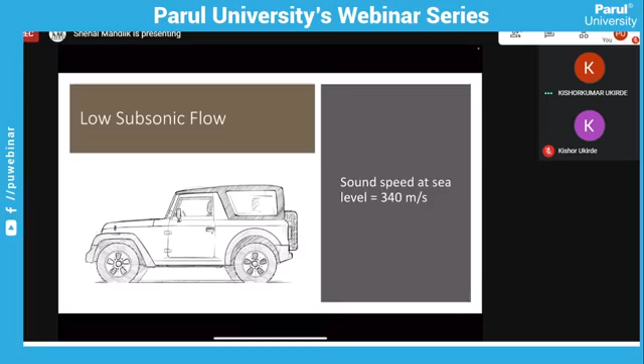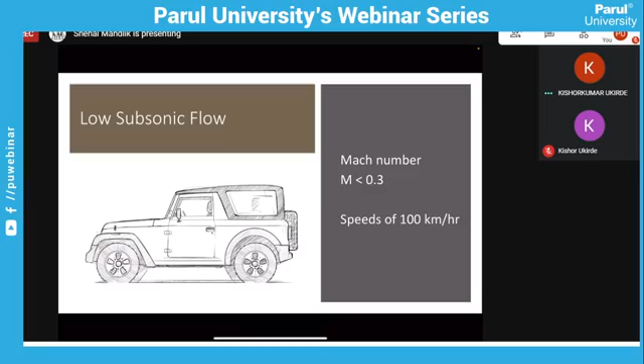It has a velocity of maybe 100 km per hour, or maybe it can travel at about 200 kilometers per hour. If you look at the speed of sound at sea level conditions, that is on the ground, it would come to about 340 meters per second. And now if you calculate the Mach number given by this particular formula, you will understand that the Mach number will come far, far less than 0.3. So such vehicles traveling at such low Mach numbers, less than 0.3, are traveling at a speed which is considered low subsonic flow speed. Okay.

Now our airliners, let us say for an example, the Airbus A380. This airliner generally takes a speed of about 0.8 or 0.7. That falls between the regime of 0.3 and 0.8. And these kinds of speeds are generally regarded in the category of high subsonic flows.

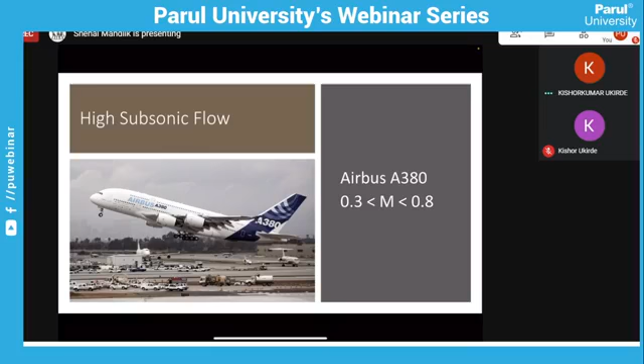Now, what if I increase my Mach number? What if I go close to the speed of sound? So let us assume that we cross the speed of sound and we were able to achieve a Mach number greater than 1. So we enter, that is, after crossing the sound barrier, which is equal to the speed of sound. Now, imagine that you go at a very, very high speed, which is far greater than the speed of sound. That regime would be considered as a hypersonic speed. Generally in fluid dynamics, speeds more than Mach number 5 are considered as hypersonic speeds. Okay, now what is this hypersonic?

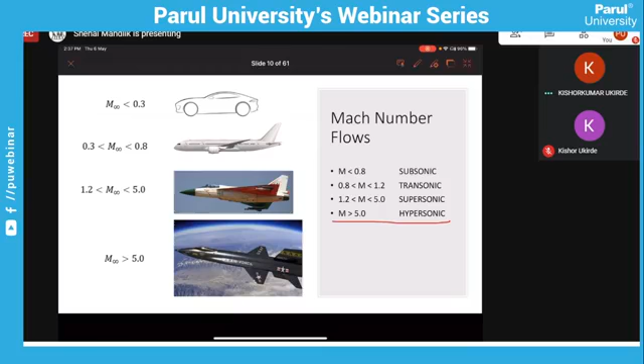So before talking about hypersonic, let us see how you actually cross the sound barrier, which is the speed of sound. When any vehicle travels at a speed closer to the speed of sound, for example, in this figure, a military aircraft traveling at about 0.8 or 0.9, it will experience shock waves generated on the surface of the body, and those shock waves interact with the boundary layers and separate them. That is going to induce drag on the body.

So you will also see such phenomena in the flow field when you are reaching the speed of sound in an atmosphere. This particular phenomenon is called the sonic boom, created when you are about to cross the sound barrier. Okay.

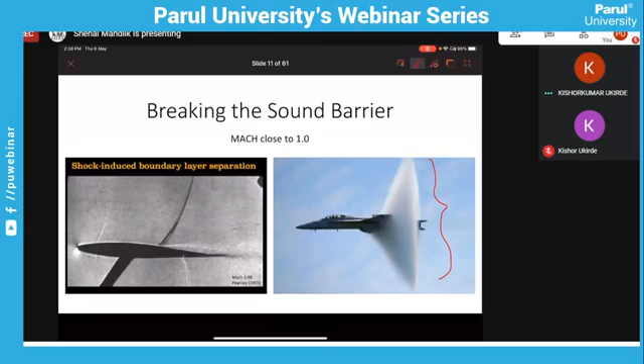Okay, so let us see at subsonic speeds, which is Mach number less than 1, any object will be emitting pressure waves. These pressure waves travel in all different directions, and they bring information of the surroundings to the object traveling at a particular speed. At subsonic speeds, this information is readily available to the object. Why? Because the pressure waves travel at the speed of sound.

When your vehicle is traveling less than the speed of sound, you obviously know the information about the surroundings, and hence you can adjust yourself to them. In other words, the flow around the object will adjust itself such that it follows the contour of the object. Now, when you reach Mach number 1, you see a very complicated phenomenon where the pressure waves overlap each other, and the object just knows that there is something around it.

And when you cross Mach number 1, the vehicle is traveling faster than the pressure waves, which are lagging behind the object. So the object is moving faster than the speed of sound, meaning the pressure waves lag behind it. So the object now doesn't have any information about the surroundings, and the gas molecules present in the surroundings actually come and hit the object.

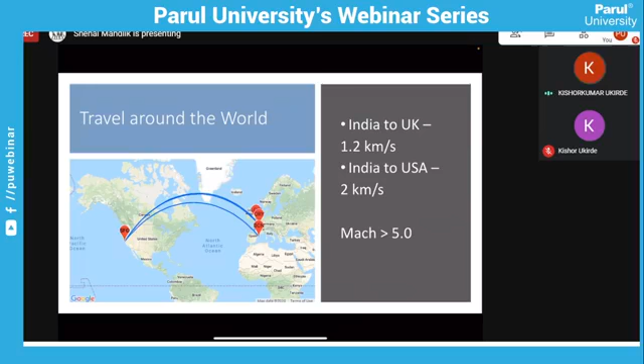So we'll go back to our question: can we travel within a couple of hours? Yes. So if you travel at a speed of about 1.2 kilometers per second, you will be able to reach UK in maybe a couple of hours, maybe 2 hours. And if you are able to travel at a speed of 2 kilometers per second, you will be able to reach USA from India maybe in just 2 or 3 hours. So these speeds, what I am talking about, correspond to Mach number greater than 5.

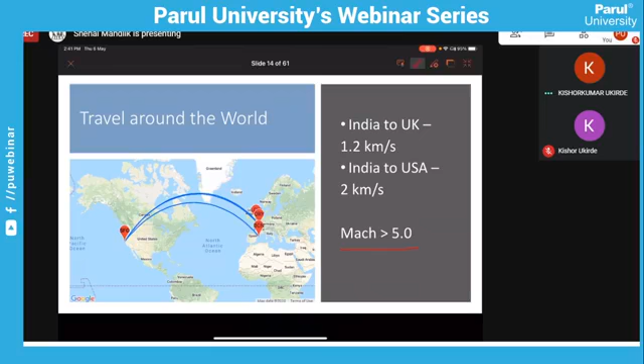Okay. So what is the meaning of hypersonic technology that I am talking about? The hypersonic technology means that we are going to save our time. Probably you might have a lunch in one country and go back for the dinner to your own country. You can go for a space exploration, you can go for interplanetary travels, or you can just go for a tour to the space with your family. So once the hypersonic technology comes into picture, all these things could be possible.

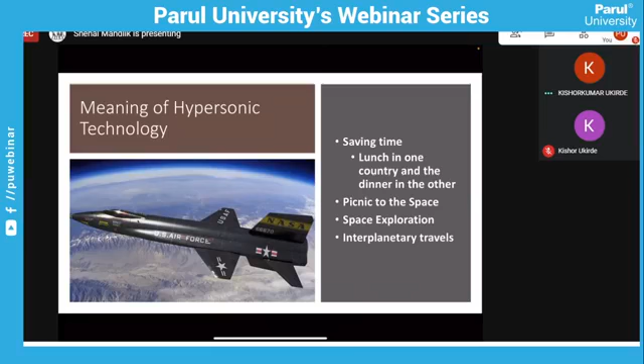There are certain applications of hypersonics. So the technology could be used for space exploration, the interplanetary travel, the missiles guidance system, the missiles which could be useful for the national security, the atmospheric re-entry of the vehicle into any of the planet's atmosphere, and then obviously the commercial flights, which will be helpful for the common man.

So there are certain subdisciplines we must look into before getting into hypersonics. These subdisciplines of hypersonics govern the entire flow physics or the design of the vehicle. First is the structure. So when you are traveling at very high speeds, the vehicle experiences very high mechanical loads, which may not be very stringent for the subsonic or the supersonic flight aerodynamics, but for hypersonic aerodynamics, it is very important that you design a fuselage which can withstand such high mechanical loads.

Next is the guidance and control. If you are traveling at such high speeds, which is equivalent to 2 kilometers per second, let us say, for an example, at that high speed you may not be able to guide your vehicle using a satellite or using a ground station. So there is a need to develop autonomous guidance systems and advanced control systems, which will guide the vehicle in all the different atmospheric conditions. Okay, and also the hypersonic vehicles deal with a high altitude, and there is a need to additionally include the control measures such that at those higher altitudes the vehicle should be able to sustain the speeds.

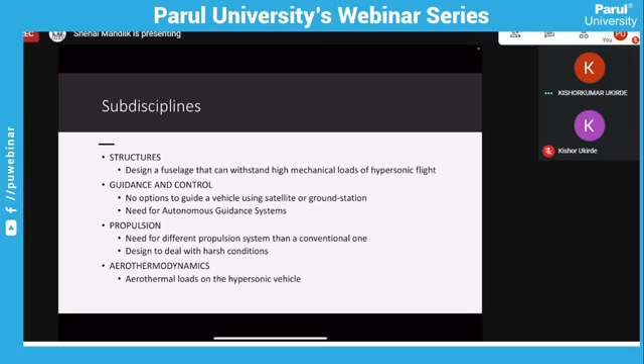So before talking about these vehicles, let us see what hypersonic actually means. So hypersonic is a discipline which connects aeronautical as well as astronautical engineering, where we see the body is moving in a gaseous atmosphere, where the velocities of the body will be far larger than the speed of sound.

Okay, or the speed of sound in the gases. Now, specifically, aeronautical engineering deals with the flow around vehicles which are traveling at subsonic speeds or supersonic speeds. That could include airliners, your helicopters, your drones, or maybe a supersonic fighter. And all these different phenomena occur within the Earth's atmosphere.

Now, coming to the astronautics domain, it deals with the orbital motion of the satellites and the planets. Okay, the motion is obviously happening in the vacuum of space. So hypersonics, the discipline which connects aeronautics and astronautics, sits between these two fields, where if you want to increase the speed from aeronautics and enter the astronautics domain, you need to have a certain gateway. So hypersonics could act as a gateway that connects aeronautics and astronautics.

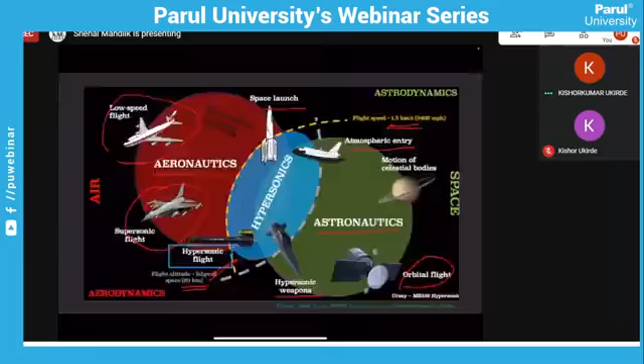Particularly, if you talk about hypersonic speeds, it could be bounded by a lower limit of as low as about 1.5 kilometers per second, and it will be bounded by a maximum altitude of roughly about 90 kilometers above the Earth's surface. Okay, so as I was mentioning, there are a few types of hypersonic vehicles. One is the atmospheric re-entry vehicle. The classical figure that you see here is of Apollo 11, from the moon mission in 1969, which could enter the Earth's atmosphere at a certain orbital trajectory.

Okay, so when the vehicle enters the Earth's atmosphere or the atmosphere of any other planet, it will enter at a speed of about 8 to 12 kilometers per second. And when it is entering at such high speeds, it will suddenly experience the gaseous environment, and in that gaseous environment there will be high mechanical loads and high heating around the surface. Okay.

And it is also important that this atmospheric re-entry vehicle enters the Earth's atmosphere following a particular trajectory, and there should not be a very large landing radius for this re-entry vehicle. Why? Because these vehicles are landed in the sea, so if the landing radius is quite large, there will be a huge investment that could go only into finding your re-entry vehicle.

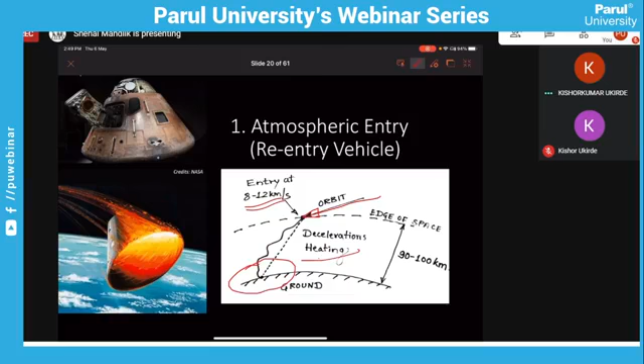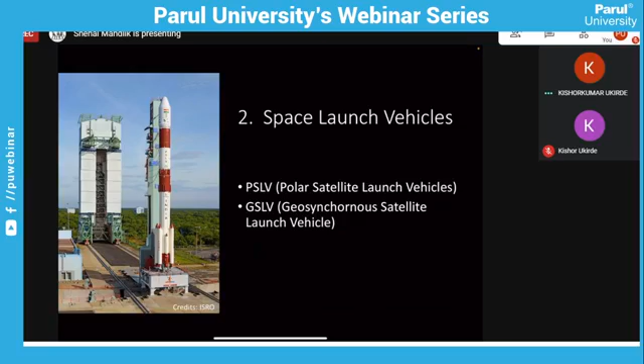The second kind of hypersonic vehicles would be of importance to launch certain objects into space or into the orbits of the Earth. So that could include some of your rockets. Obviously, these launch vehicles shown in the figure are hypersonic, but using these rocket launch vehicles, we can launch spaceships like the one shown in the figure, which is the RLV-TD, the Reusable Launch Vehicle Technology Demonstrator developed by ISRO.

So whenever the rocket launches the vehicle, it follows a particular trajectory. Before exiting the edge of space, or this particular atmospheric limit, it should add a certain velocity to the object which has to be placed in orbit or which has to escape the orbit. So depending on that velocity, the object, let's say a satellite, will be placed in a circular orbit. There could be a few other means to launch spaceships, like using hypersonic gun rails, as well as some other technologies which are still under development. So when you use such high speeds at ground itself, you will be facing heat loads acting on the surface of this vehicle. Okay.

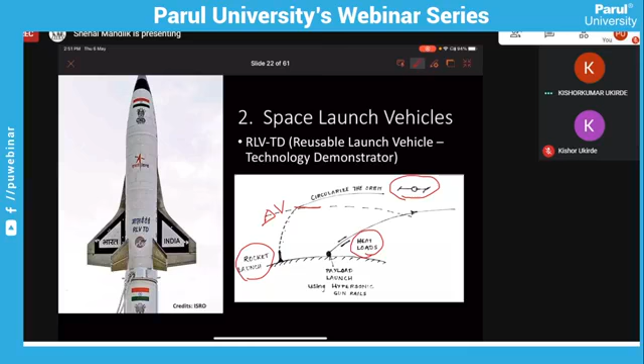And there are a few hypersonic weapons which could be developed for national security purposes, like intercontinental ballistic missiles, boost glide, or cruise missiles. These all could be useful to protect the nation. Okay. This kind of missile could also be very helpful in delivering conventional or nuclear payloads within a few minutes, and it can also effectively penetrate missile defense systems. And also these kinds of weapons would be helpful to knock down satellites which might be roaming around in your atmosphere. Okay.

And a few other applications of these hypersonic weapons include the launching of small or medium-sized satellites at a very low cost.

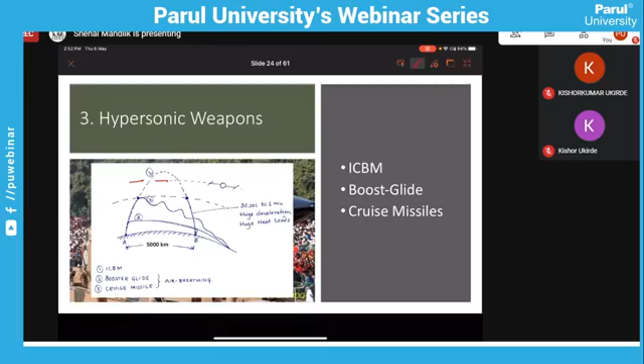And a very final type of hypersonic vehicle could be a hypersonic commercial flight, which everyone would like to see in the near future, that could make civil transportation very fast. This is an interesting and exciting field where people are still working, and it will be operating within the Earth's atmosphere.

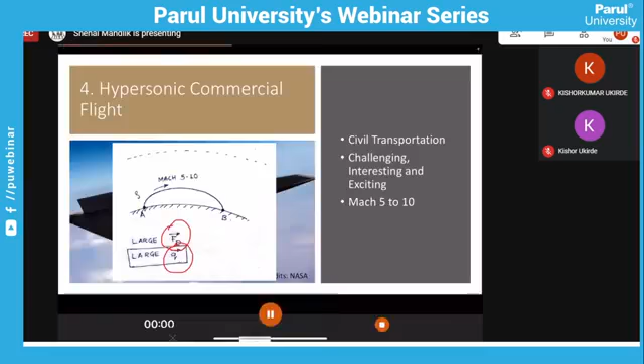Okay, but when you're operating in the Earth's atmosphere, you will obviously see that these kinds of vehicles will experience large drag forces and large heat loads, and those are a few of the challenges in the hypersonic flow field. Okay, so this is a view of NASA's X-43A, which is a hypersonic craft they tested a decade ago.

So coming to the history of hypersonic flow. How did hypersonic flight come into the picture? What you see in this slide is the picture of a V2 bomber. It was originally designed as a supersonic missile during the World War by Wernher von Braun. Now, after the World War was over, this rocket, or this V2 bomber, was used only for experimental purposes.

And one fine day, when this rocket was launched on 24th February 1949, they were not able to recover it. They later found out that this rocket went as high as 392 kilometers from the Earth's surface, and it was able to reach Mach number 5.3. And on that day, the V2 bomber became the first human-made object to go to hypersonic speeds.

Okay. Now, this particular object, which was originally designed as a supersonic missile, went hypersonic. So what happened to the vehicle? The answer lies in the next slide. So let us see one video about what could happen if you go hypersonic.

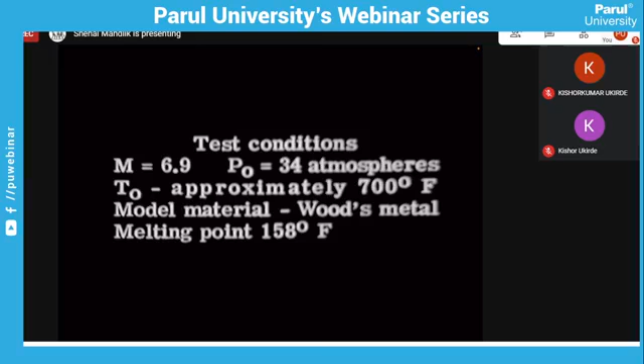So this is one of the experiments that was done at NASA's Langley hypersonic wind tunnel, where the model was kept in a hypersonic flow of Mach number 6.9. So we have a hemispherical headed cylinder here. When the sphere is kept in a hypersonic flow, let's observe what happens to the object.

So you can see that the front nose of the object is melting down, and eventually the entire object will disappear in the atmosphere. So it is very surprising to know that at such high speeds, if the material or the craft is not able to bear the mechanical and thermal loads, it will melt down or turn into ashes. And that's what happened to the V2 bomber.

Okay. And if you look a little bit ahead, they had a conical object kept in the wind tunnel at the same speed. So the conical cylinder turned out to be a hemispherical headed cylinder.

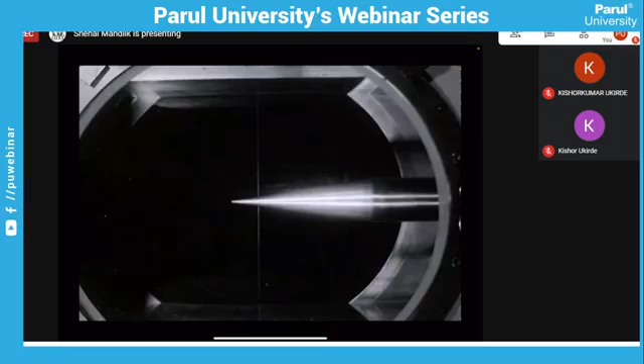Okay, so as I said, the V2 bomber completely disintegrated or burnt into ashes. Next, a few years later, on 12th April 1961, Flight Major Yuri Gagarin took the first flight around the Earth on Vostok 1, the Soviet Union spaceship, and he was the very first human being to experience hypersonic speeds. The speed he experienced was about Mach number 25, a tremendous speed to experience in a spaceship. He took a flight of about 108 minutes around the Earth.

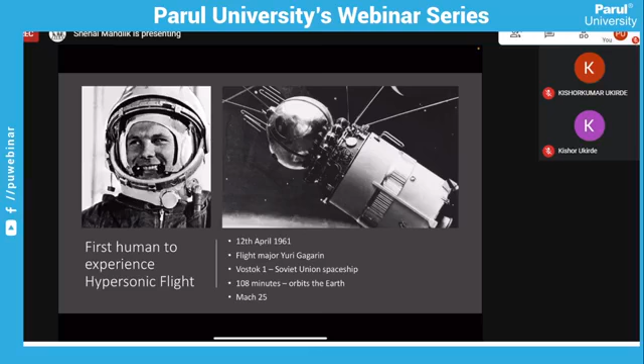Later, there were many developments in the 1960s. For example, in 1961, on May 5, Alan B. Shepard became the second man to take a hypersonic flight in space, where his re-entry vehicle was at a hypersonic speed of about Mach number 5. In the same year, on June 23rd, US Air Force test pilot Major Robert White flew the X-15, a hypersonic aircraft, at about Mach number 5.3. And in the same year, the X-15 broke its own record and reached Mach number 6.

And later, on August 22, 1963, the X-15 broke its own record again, reaching Mach number 7 at an altitude of about 107 kilometers. Okay, so 1961 was a bumper year for manned hypersonic flights, where humans could actually experience hypersonic speeds in either a re-entry vehicle or a hypersonic aircraft.

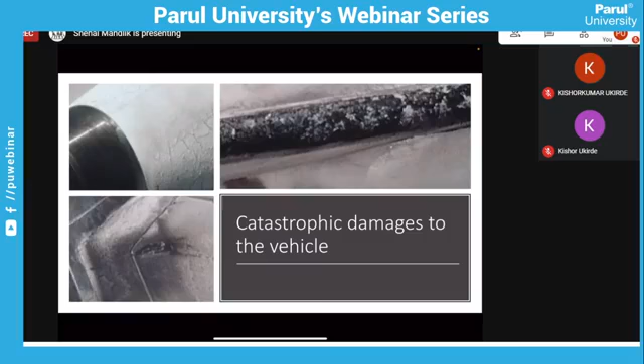So what happens when you have such high temperatures is this. Your spaceship or the spacecraft or the re-entry vehicle, any hypersonic vehicle, will experience such kind of catastrophic damage. The fuselage will go off or it will burn off into ashes. So there are certain challenges in hypersonic flows, like the thermal barrier, which is the main challenge. And because of the thermal barrier that you have at hypersonic speed, you have to develop materials which will be compatible with that particular temperature. So we will be developing thermal protection systems for hypersonic vehicles.

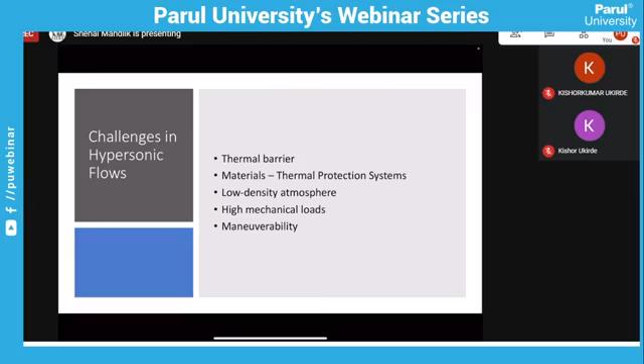And there are high mechanical loads, there is a low density atmosphere, and the maneuverability of the craft. So the fundamental problem in hypersonics is to calculate the mechanical loads on the aircraft and to investigate the thermal loads on the aircraft, which might be very easy for subsonic and supersonic flows. But if you talk about hypersonic, both these loads have a strong coupling among themselves, and there has to be a design strategy to estimate these kinds of loads on a hypersonic vehicle.

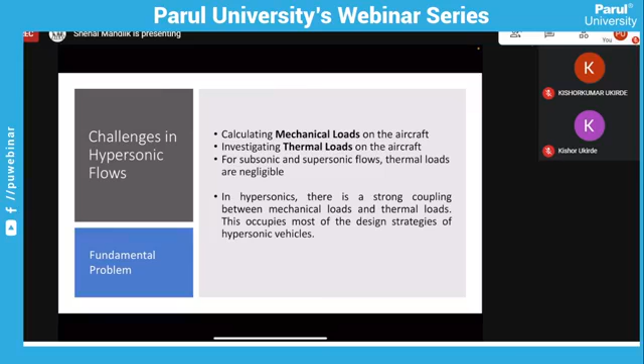Okay, so there is a few research going on in the world, be it ISRO, DARPA, Boeing, or NASA, to name a few, who have been investing in hypersonic technology, such that maybe in another 10, 20, 30 years, we will be able to do so. Obviously, all of them have been working on this technology for the past 50, 60 years. So just for an example, Boeing's X-51 WaveRider, which took its unmanned flight in 2013, was able to achieve speeds of about 1788 meters per second, which is 1.7 kilometers per second, at an altitude of about 21 kilometers.

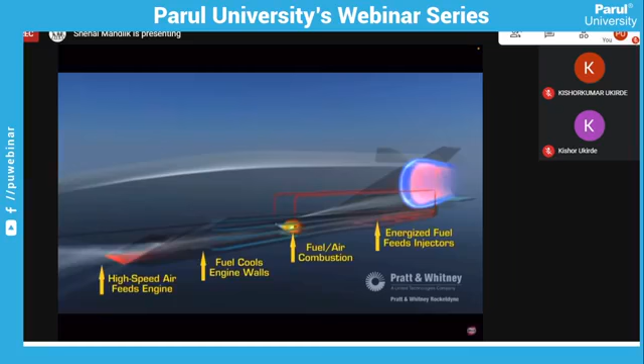So the most important thing to note about this aircraft is that at hypersonic speed, if you are designing any commercial aircraft, it has to operate by means of a scramjet engine. The scramjet engine, which is shown in this particular video, is integrated with the airframe completely, which intakes the high-speed air, and that air goes to the combustion at supersonic speeds, and it is able to generate speeds as high as Mach number 4 or Mach number 5. So you could see on the right hand side the altimeter and the Mach meter, which show the altitude of the craft as well as the Mach number it is achieving at different instants of time.

Okay, so Boeing is still working on redesigning the X-51 WaveRider. Why is it called a WaveRider? Because it pierces the wave, that is the shock wave, which is created at hypersonic or supersonic speeds. Hence it is called a WaveRider, which is still under development. If you recall NASA's X-43A, which was launched on November 16, 2004, it was able to achieve Mach number 9.6, but that was only for a few seconds, maybe 20 or 30 seconds, and then the craft went down. And they are still researching this hypersonic aircraft. And DARPA is working on a hypersonic technology vehicle to carry human beings from one place to another.

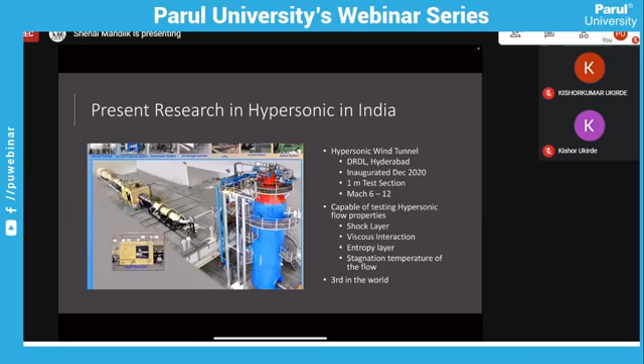And recently in December 2020, India set up its biggest facility of hypersonics, that is the hypersonic wind tunnel in DRDO's DRDL laboratory at Hyderabad. This is a 1 meter test section, and with this facility, we'll be able to estimate what happens around a given hypersonic vehicle. We will be able to study the shock layers, the viscous interaction, the entropy layer, the stagnation temperatures, and all these different aspects. And with this, India became the 3rd country after US and Russia to have such a facility.

So all the research that is going on in the world is mainly in the field of propulsion systems, that is to have an efficient scramjet engine which will be able to propel the craft at hypersonic speeds. And when you have hypersonic speeds, you have thermal loads. So material development is being done to ensure that the protection of the hypersonic vehicle is adequate. Ultra high temperature ceramics are being developed to sustain such high temperatures. There are guidance laws being developed because if you travel at such high speeds, you will not be able to maneuver your vehicle in any direction. So guidance laws are important to perform any maneuver.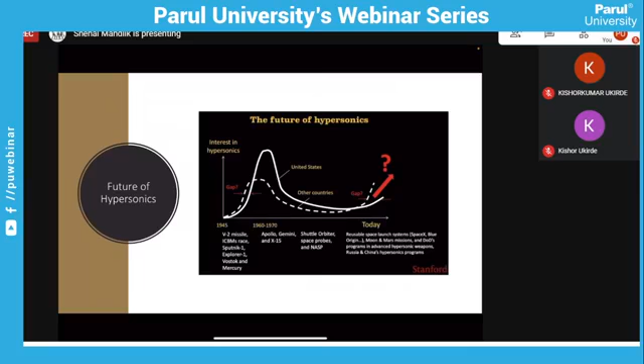Okay, so here we don't know what happens in the future, but it looks like it goes up, and hopefully in the near future we will be able to see some kind of hypersonic vehicles like this. These are all the imagination that we do, or you might have seen some of the Star Trek movies or the Star Wars movies, the science fiction movies, which show hypersonic vehicles traveling from one planet to another planet.

Maybe in a near future that is possible. And if you dream of something, you should not sleep. Okay, so to make this technology happen, we have to work. So probably in the next 20 years or 30 years, we might have a commercial flight of hypersonics with the same cost. Okay, these are some of the references, and thank you.

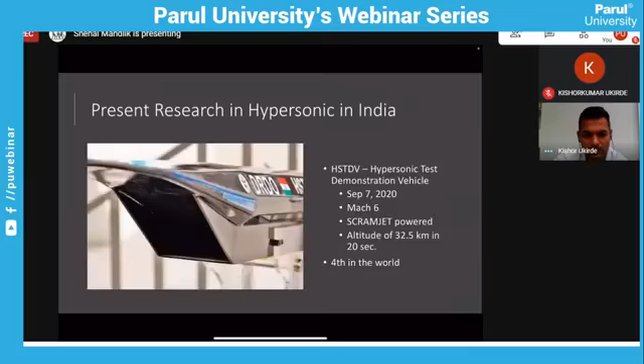So in hypersonics, what we actually see is the flow physics, what is happening around the vehicle. When I talk about the characteristics of a hypersonic flow, these characteristics can happen at Mach number as low as 3, or this might happen at a Mach number of 8. So whenever the aircraft experiences these characteristics, you call that flow a hypersonic flow. There is not a very huge reason, but just as a thumb rule, we say that the hypersonic flow starts at Mach number 5. It can also start at 4.5, or at Mach number 6, 7, 8, depending on which atmosphere you are traveling in. So these are the characteristics that you should look at when you are talking about the hypersonic flow.

Okay. One question is regarding materials. Can you shed a light on what sort of materials are used for hypersonic vehicles? So if you talk about materials, generally they use the ultra high temperature ceramics like silicon carbides or zirconium borides. Such kind of materials are being used not for the entire aircraft, because if you make the entire aircraft using this material, it will become very costly.

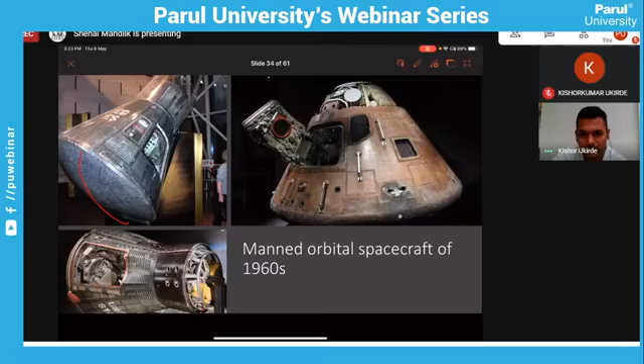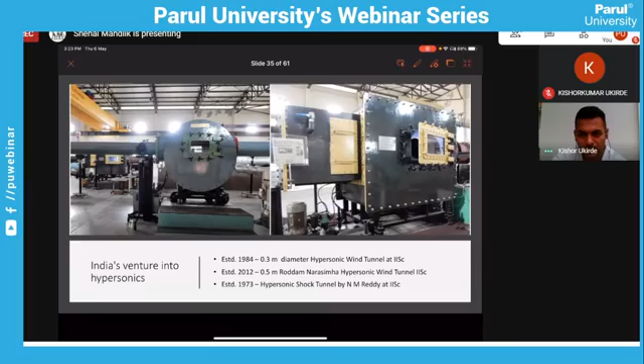Okay, so how do you visualize the flow? As you see in this particular figure, you have this test section. A similar test section will be there in the shock tunnel. The only thing is you might have different flow properties in the test section. Now, how do you visualize this? You just have to put a camera, but just putting a camera doesn't help. So you have to use maybe a Schlieren technique. The Schlieren technique works on the principle of refraction of light; you can go and learn about what the Schlieren technique is.

To give a clear understanding of what Schlieren does, let us assume a car's flashlight is coming onto your eyes. What you will do is shrink your eyes, right? Once you shrink your eyes, you will be able to see whether it's one single flashlight or multiple small lights combined together to create that light. So what you are actually doing is refracting the light waves. You are not allowing the entire flashlight to come onto your eyes. You are eliminating some of the light rays by shrinking your eyes. That is the same thing that is done in the Schlieren.

You have light rays coming from one side and an object in the middle, and the light will pass through the object and refract, deflect, in all directions. Once you cut the light at a focal point, you will be able to see the density gradients in the flow field. Air has very fine molecules, and those molecules will refract the light coming onto them. You can cut how much light you want to stop and how much light you want to bring onto the camera, which is the eye, and see what is happening to that particular air. So basically, Schlieren estimates the density gradient in the flow field.